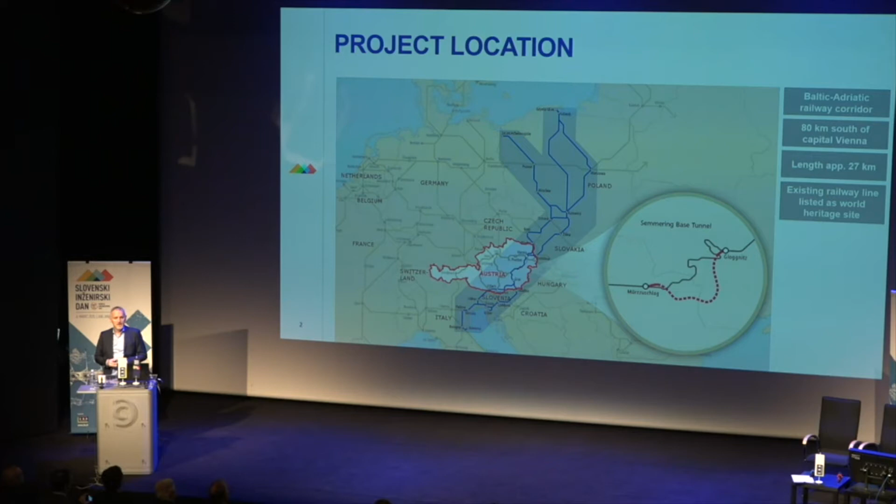In addition, it's a designated World Heritage Site, which is also not in favor of modernization and renovation, as you all might know. The new alignment is shown already in the red dotted line, and we can see this later on in more detail.

That's why the Austrian Federal Railways decided to go for a new solution, the Semmering Base Tunnel. It has a total length of 27.3 kilometers and is a twin-tube single-track system.

It's connected by 56 cross passages, and we have an emergency station in the center of the tunnel.

We have 4 main tunnel construction lots, indicated here on this slide, and it's a mixture of TBM and NATM approach. There are 8 kilometers of TBM excavation in the center of the tunnel, in the central construction lot.

There are 2 times 19 kilometers of excavation by means of NATM. The reason for this is the geological conditions, which as you will see later on are quite complex.

Excavation started in 2014 and will go on till 2022, so we hope. Excavation is only taking place from the east, from the Portal Gloggnitz and not from the Portal Mürzzuschlag, which you can see on the left-hand side.

No excavation is taking place there. This is due to restrictions in terms of noise and pollution.

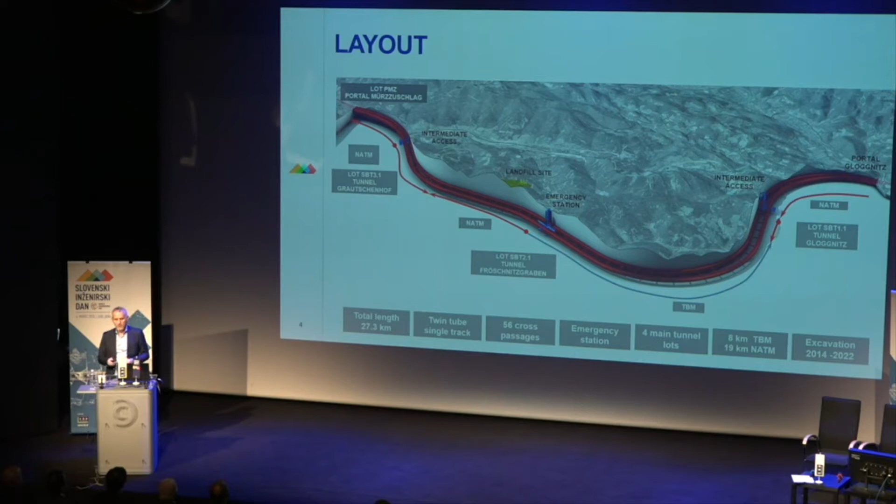This shows how the whole thing is structured, showing the different construction lots from the entire project. You can see it's divided into certain areas. We have the Portal Gloggnitz on top, the Portal Mürzzuschlag on the bottom, and in between we have the 3 main tunnel construction lots.

As well as the Tunnel Grautschenhof, equipment and tracks as areas. These areas are further subdivided into individual construction lots.

In red, highlighted in the red rectangles, are only the construction lots I was talking about before, the main tunnel construction lots. So the main subsurface tunnel construction lots, as well as the Portal Mürzzuschlag, where we have a cut and cover section.

And you see immediately, it's almost 30 different construction lots, different contracts. So a lot of people are involved in this project.

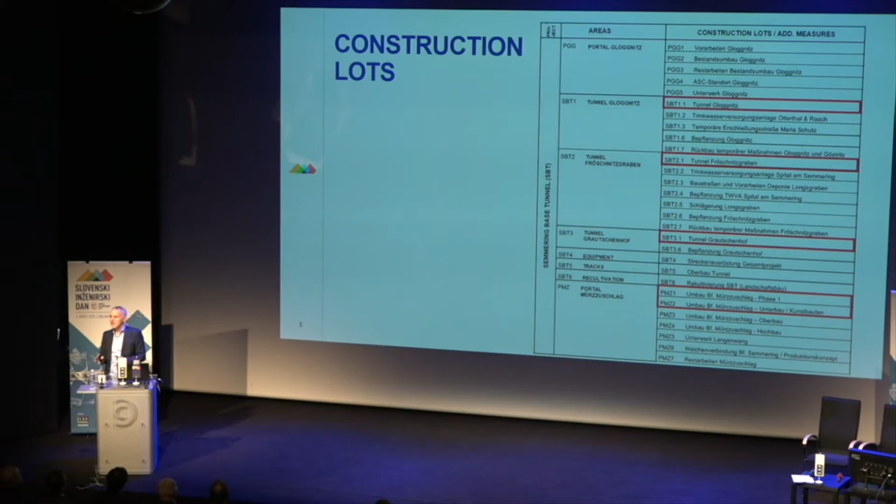So you can imagine tools have to be integrated, means and measures have to be integrated so that this works out properly. Just a few words, as I said before, about the geology.

You can see on the bottom of the slide the entire longitudinal section, rather small but quite colorful. The red circles show the intermediate access points, and it's frequently changing conditions.

So we have metasediments, carbonate rocks, crystalline rocks - 40 different rock types are designated by the geologists in the design. Meanwhile, we found a couple more, and there are even areas where we have more than 300 liters per second of water inflow, which we have to overcome.

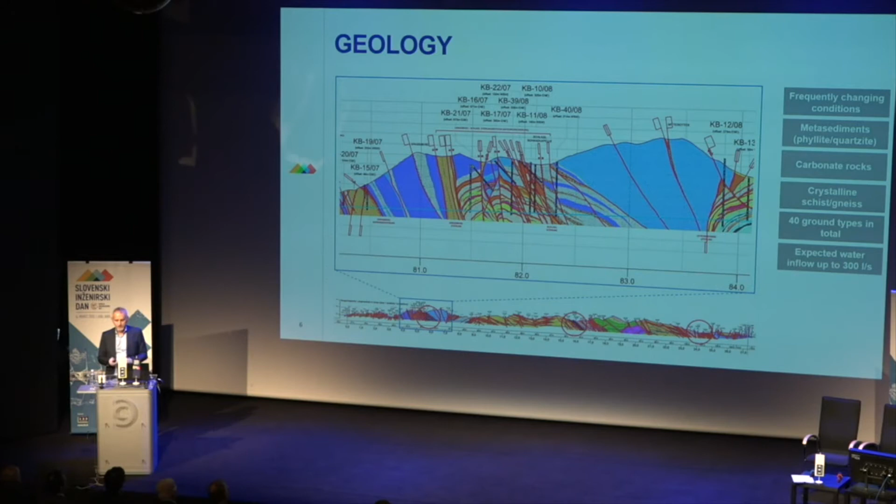The detail in the rectangle shows also one of these very prominent fault zones which we are dealing with now, and you can see it's quite a challenging project. I have to admit, for a tunnel engineer, it's the best you can have.

You have everything, so it's very interesting. Let me tell you a little bit about the structures. These are the single-track tunnel tubes. On the left-hand side you see the TBM solution, on the right-hand side the NATM solution.

We have a double shell lining system, meaning an outer lining - either the segmental lining or the shotcrete lining - then the waterproofing system with fleece and a waterproofing membrane, and then a cast in situ lining. There's a drain system with sidewall drainages on either side, and a slab track or a mass spring track bed is applied. The mass spring track bed is only applied in areas with rather shallow overburden, let's say 100 meters, and residential areas above.

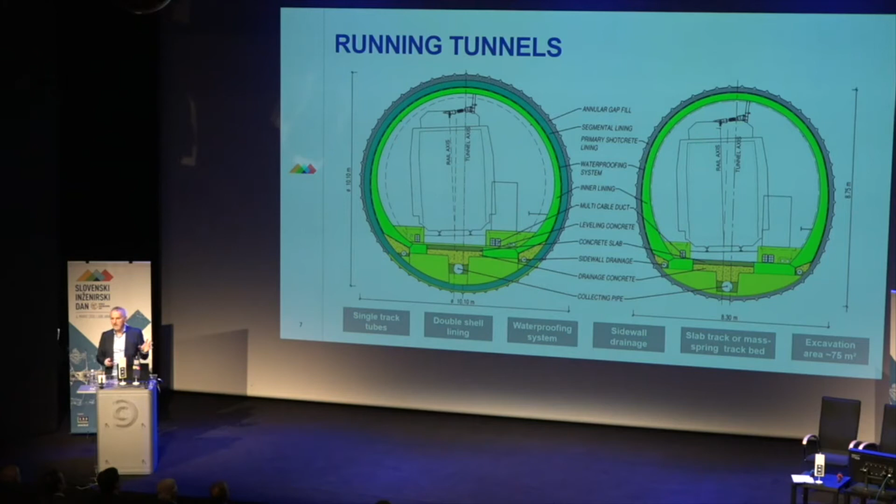As I said before, we have 56 cross passages. They have the same lining system, a double shell lining, waterproofing system and outer lining, excavation area around 35 square meters. The cross passages have a spacing of around 500 meters, or maximum 500 meters.

This is also optimized now during construction. So we were not going to the maximum for each cross passage - we were trying to optimize now, given the geology we are encountering.

These cross passages are not only foreseen so that people can cross from one tube to the other, from the affected to the non-affected tube, but they also house electrical and maintenance facilities. You can see this on the side - there's the emergency passage, and on the right-hand side you see there are technical rooms equipped in these cross passages.

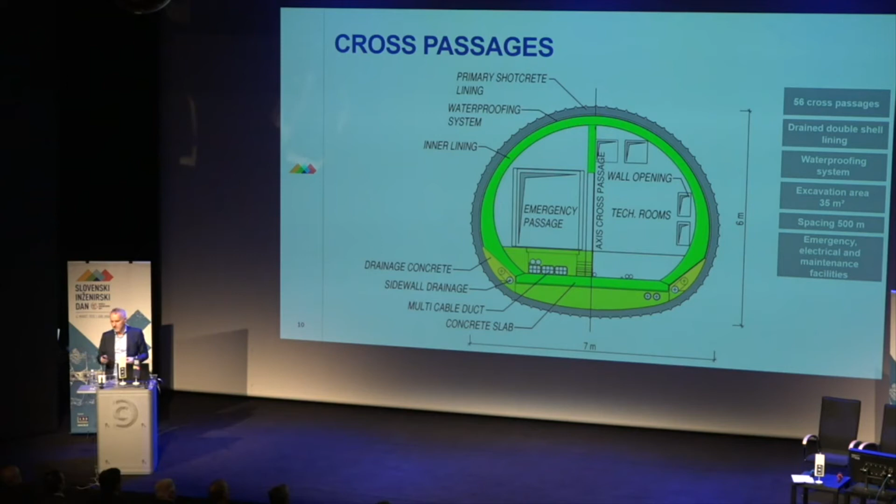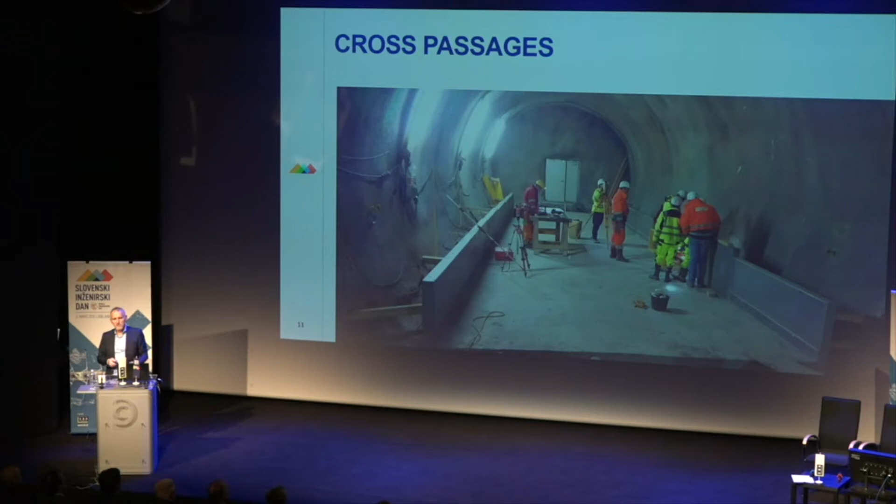This is now one of these cross passages from the NATM section, where already the invert concrete is cast. It's just closed to the running tube for ventilation purposes on the opposite side.

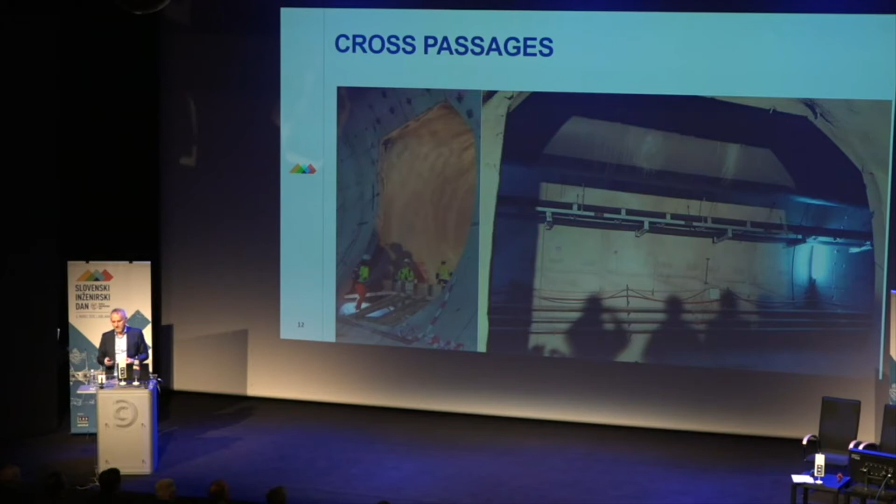As said before, what we also have is an emergency station in the center of the tunnel. It's given by the law - if the tunnel is exceeding 20 kilometers, you need an emergency station.

And this emergency station consists of various structures - caverns, tunnels, passages, galleries. Size-wise, it goes up to 300 square meters.

People leave the train, cross via the escape passages to the rescue cavern, wait there till they are picked up by a rescue train in the non-affected tube. This is more than 300 meters long, and it's also used, as you can imagine.

And from this construction lot, at two of the shafts, 2 TBM drives and 2 NATM drives have to be equipped. So all the material supply and disposal has to take place via these 400-meter deep shafts.

And that's why this area underground is already used during construction - these caverns, for placement of the site installation. So all the site installation area, which we normally have on ground or in the area of the portals, is put underground in this case.

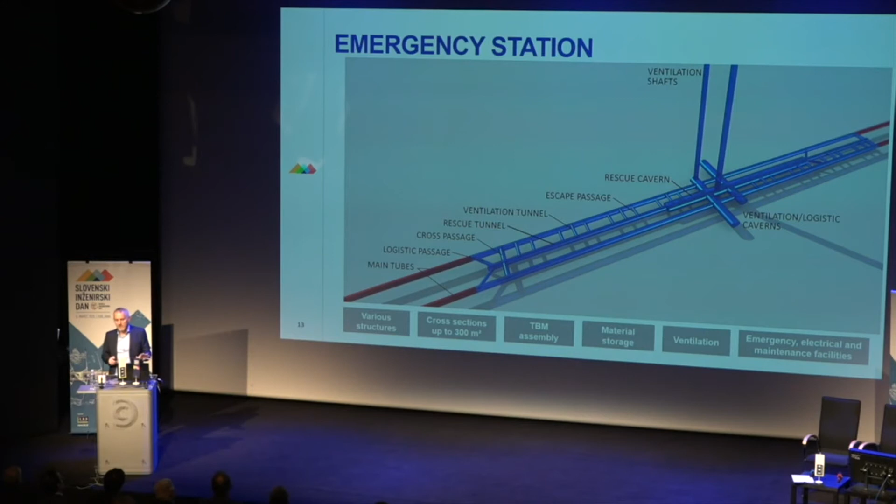This was the idea from the design: all these site installation facilities, which you normally have outside, are brought underground. This is at the toe of the shafts, and we have the workshops, the concrete plant, the material storage—everything is put underground.

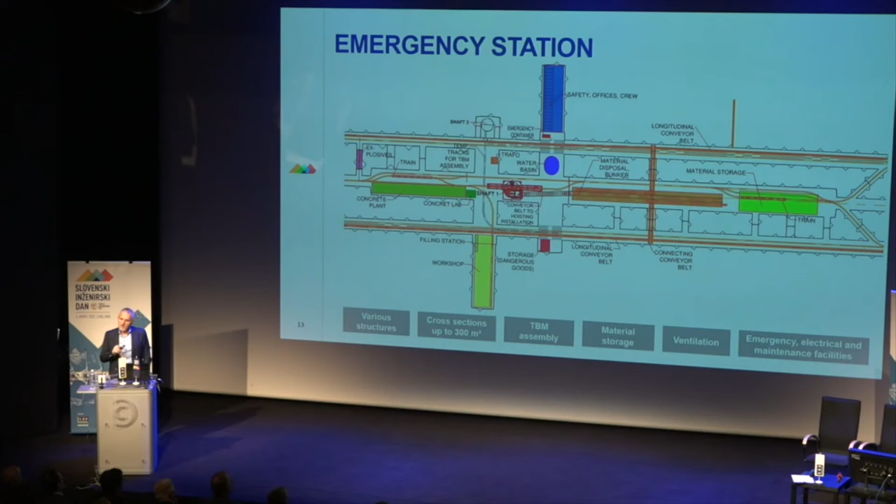You can also see these inclined cross passages connecting the cavern area with the running tunnels, just to facilitate the track alignment during construction.

This is also showing the arrangement of the conveyor belts. You see the running tunnels left and right, the cavern in the center, and the ventilation gallery, which is a permanent structure, and the temporary mucking gallery, used for these conveyor belts just to get the material out of the excavation of the running tunnels in the main cavern, into the bunker, and up through the shaft to the surface.

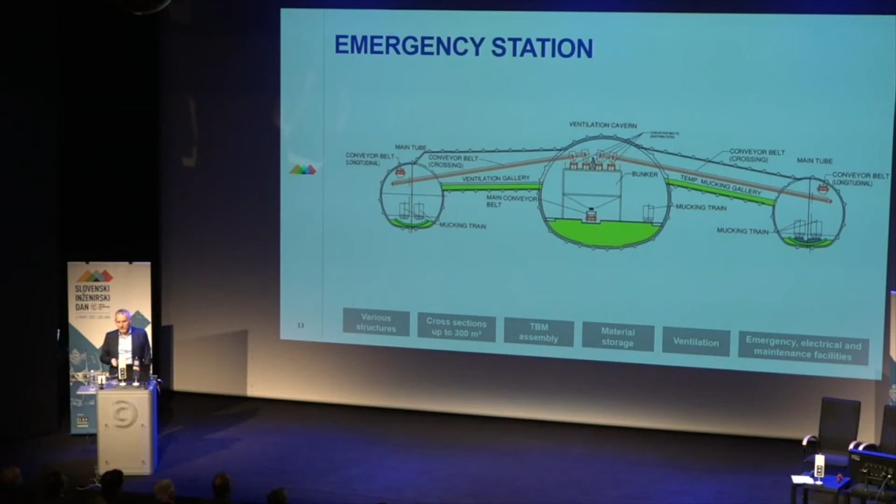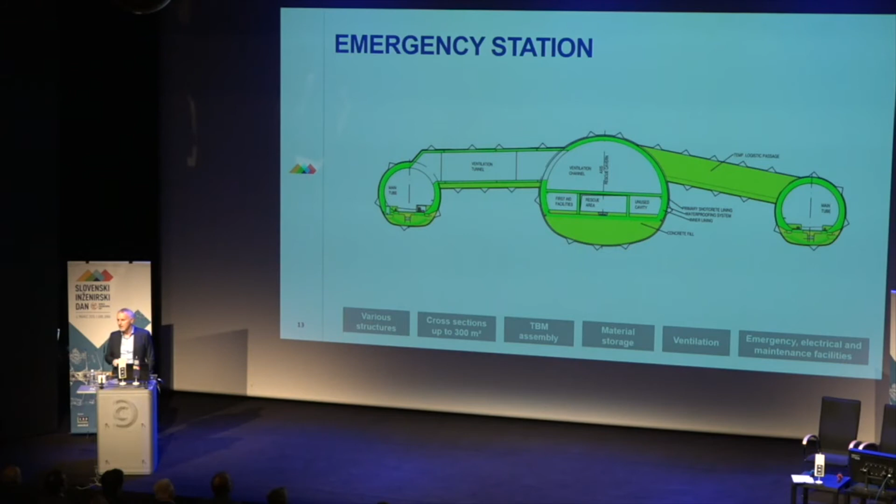In the final configuration from this situation, the temporary mucking gallery will be completely backfilled, and the ventilation tunnel will be kept open for ventilation purposes. In the cavern, the final configuration also houses maintenance, electrical and emergency facilities for ventilation purposes.

Also, the TBM assembly took place 400 meters underground, in the center of the central cavern. This is done prior to the start—this is the first TBM that has been assembled. All the material was brought down through the shafts, and the assembly took place in this cavern.

The size of this cavern—the assembly of the TBM—was one of the decisive factors for the size, because you had to turn it around and shift it forth and back. This gave the size. Even if you don't need this size later on, this was the decisive factor for how to design the whole cavern underground.

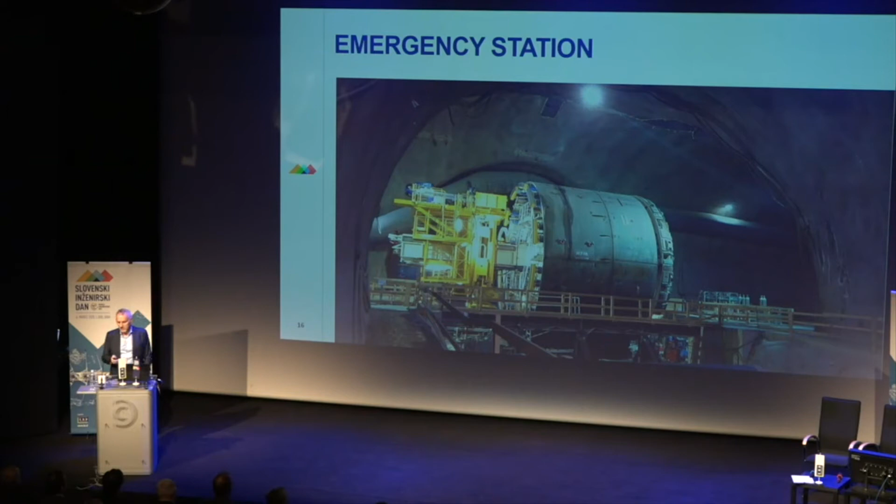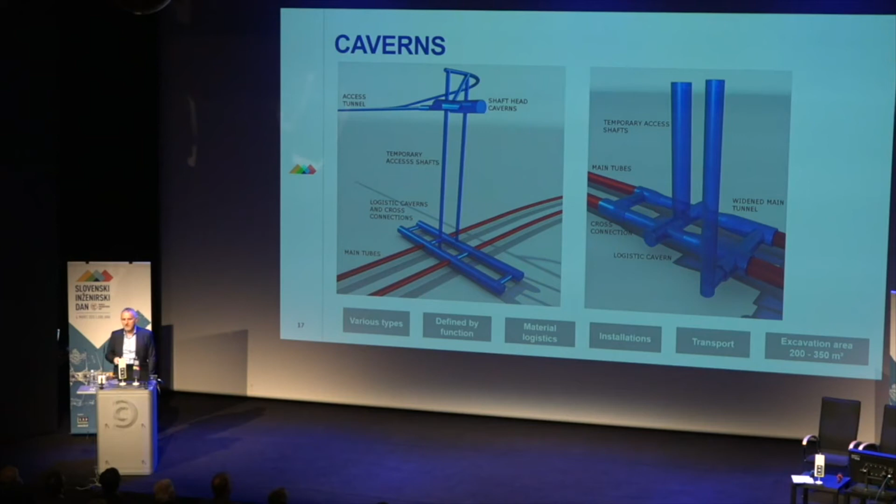Excavation areas of these caverns are in the range of 200 to 350 square meters, so considerably big structures. These caverns will be backfilled at the end of the day.

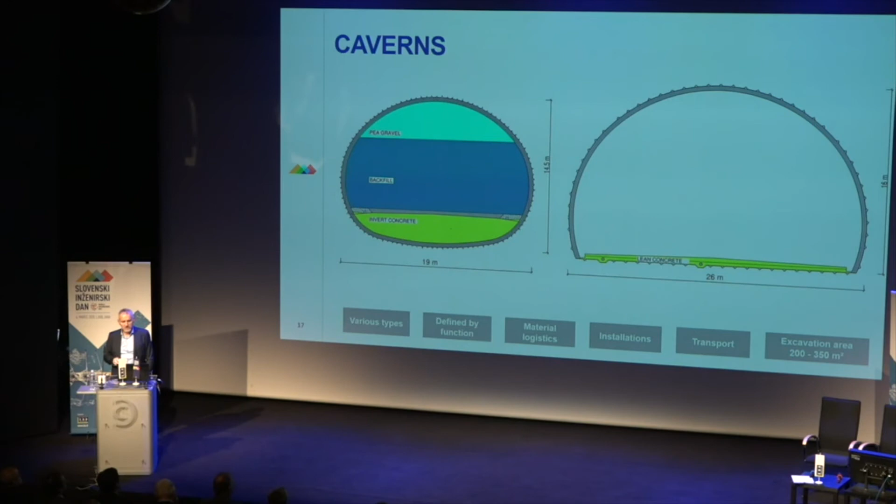This slide shows the final configuration of the construction contract. This is one of these caverns—it will be backfilled for the majority, but in this case a certain part will be kept open for the next contract.

For the contract covering track installation and equipment installation, they need a logistic possibility to cross from one tube to the other—otherwise it's too small to turn around. This has already been considered in the design at a very early stage: how can the later contracts, track installation and so on, work under these conditions?

Because there's 27 kilometers of tunnel and you only have access from two sides, it's not so easy to bring equipment and material in and out. This opening will be finally closed only once they go into operation, so even the final equipment installation contract has to close this somehow. They will find a contractor who can do this, hopefully.

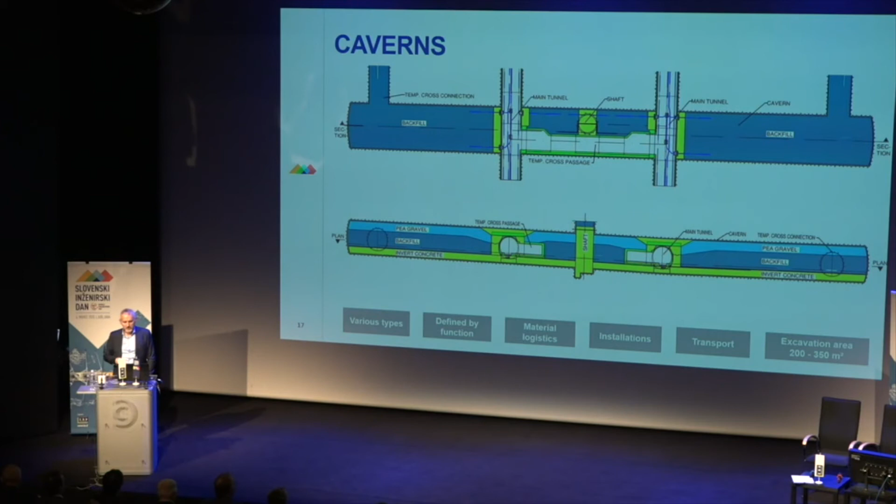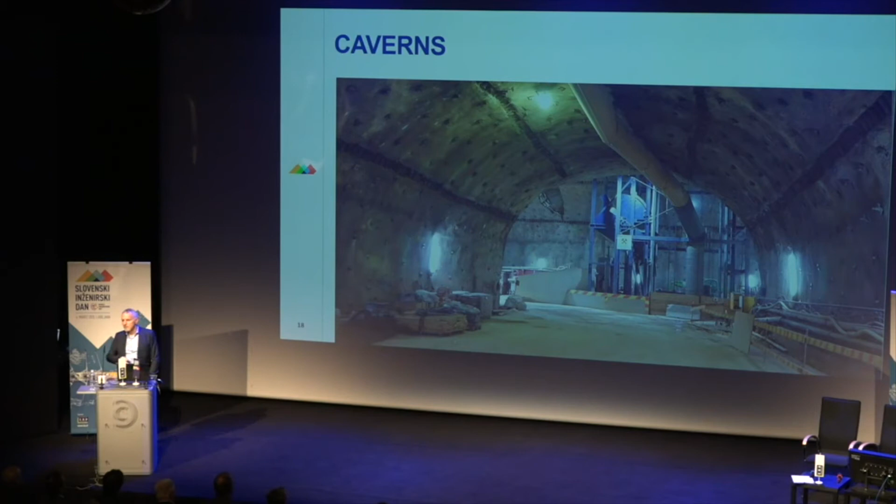This is now a picture of one of the shaft head caverns, at the end of the 1 kilometer long access tunnel. You can see the hoisting installation. The shaft goes down 200 meters, and the picture is taken from the other shaft, which is connected by a cavern here. This also acts as a site installation area and material storage in between. This is the shaft head cavern.

At the western access point, we can see a picture from the beginning, from the shaft excavation. A cavern was built perpendicular to the running tubes, and you can see in the background on the left-hand side the start of one of the running tunnels already.

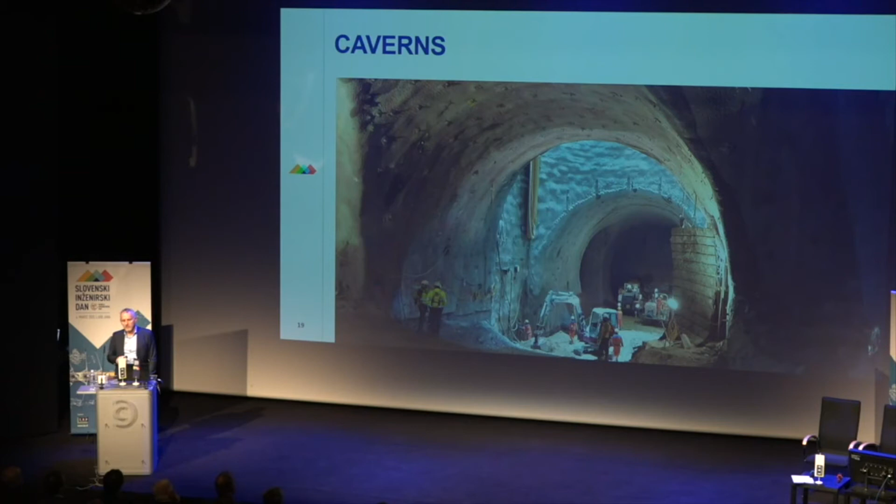The TBM was also defined already in the tender. In Austria, it's common practice that the client defines some requirements for the TBM, because the contractor normally doesn't have that much time. So the client defines the type of TBM, in this case a single shield, and minimum parameters like torque, thrust, and so on. It's also important that the machine has to be equipped or ready for additional measures like injection, grouting, and pre-drilling. This is already foreseen and defined.

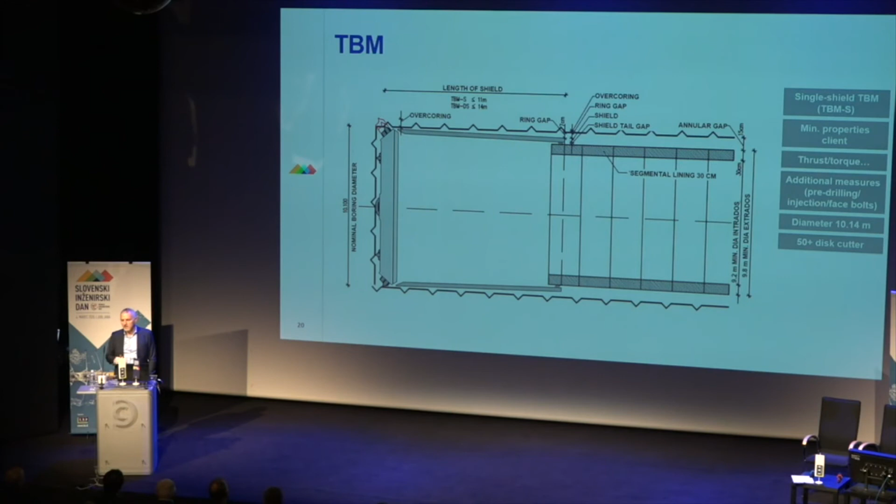Also the segmental lining was defined, precast, with 3 types defined depending on which load was taken - normal, high load, and in the area of cross passages, where you can imagine there's higher load. It's a 6+0 system with a minimum thickness given. It's also important that the contractor does not tend to squeeze out completely, or we run into troubles with cracking and so on. Planar joints, and the important thing is the segmental lining.

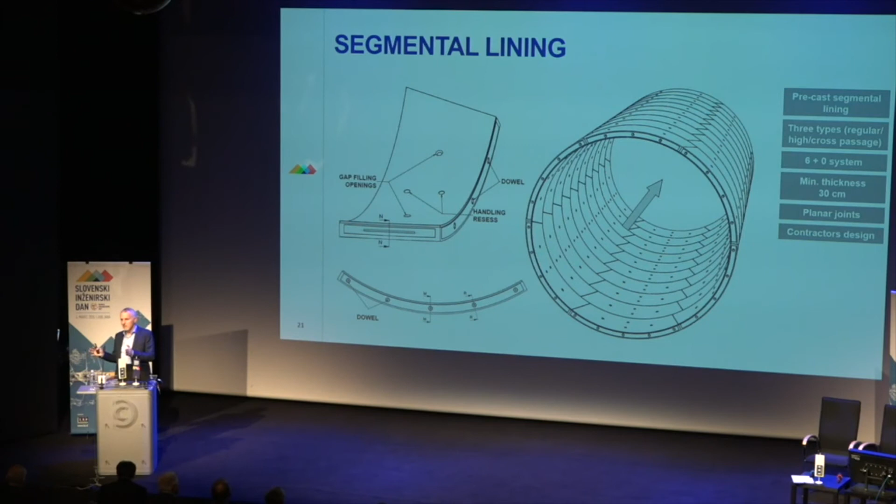The design for the segmental lining in Austria, in this case, comes with the contractor, because it's very closely related to the machine, to the pistons and so on. So there is a boundary given from the client, but the design comes from the contractor.

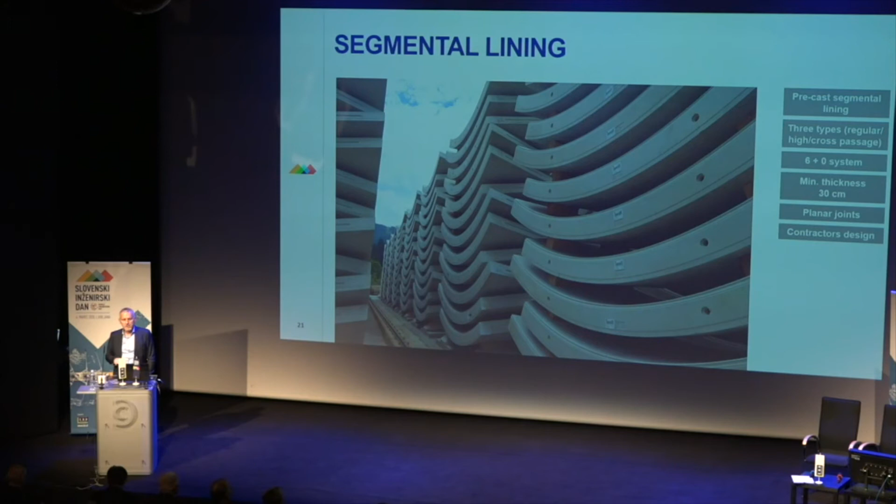Here are some pictures stacked on the surface for 2 rings, always 12, prior to transport via the shafts down to the toe. And then they're down already here waiting in the cavern, waiting to be installed in the running tunnels. This is the final configuration prior to the installation of all the inner lining and all the other things.

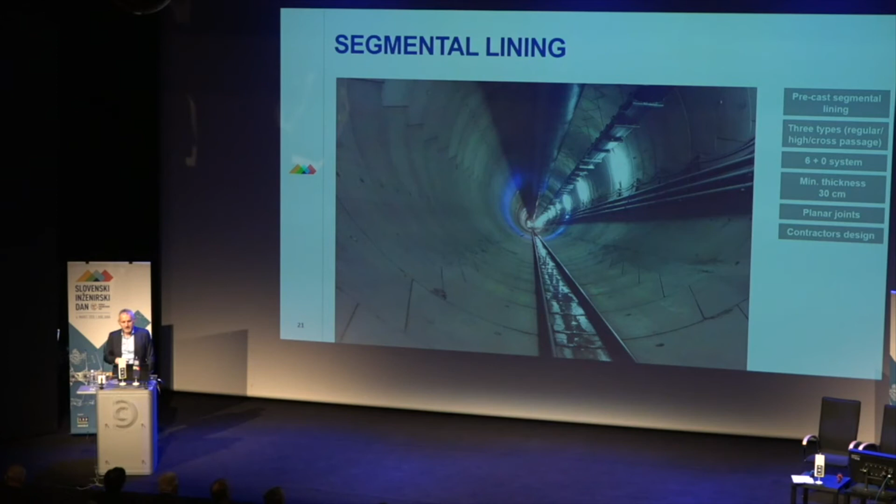Okay, so far technically, and now let's go to the management project organization.

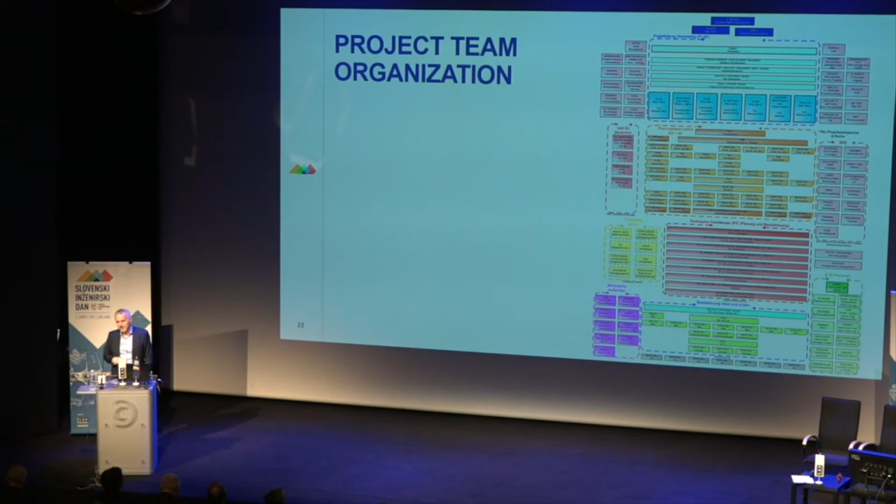So in the client's project team, we have a project head, for sure - the project lead, one person, supported by his office staff and management, cost, risk, and so on. But under the project lead, for each individual construction lot, which I showed you before - more than 25 - there is a so-called coordinator.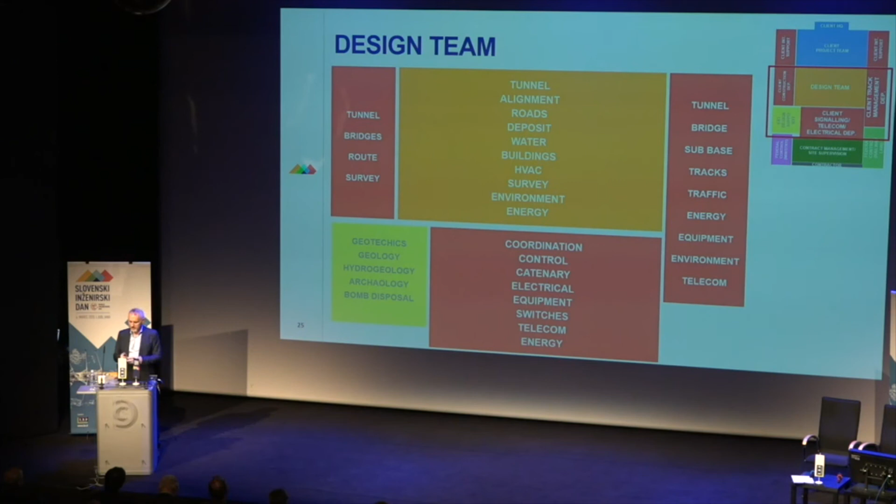Finally, let's have a look once the construction kicks in. We have the contract management on site. The contract management on the one hand are the project coordinators I was talking about before, who come from the client, and the contract management is also done from our side. So we as a design team have also our contract managers on site, because they know about the contract, we develop the contract, they are the specialists.

We have a site supervision on site, it's a separate contract. They are on site, in case of the tunnel, 24/7, around the clock. We have a geotechnical site supervision - we will see later on his role - who also comes from our side. They are on the site also 7 days a week. We have the tunnel survey on the site and the health and safety inspectors for sure, and then the contractor for sure.

They work on a day-by-day basis, daily meetings with the contractor. I just listed here project manager, site manager, claim manager, but all these people who come with the contractor have to interact on a daily basis with this contract management and site supervision team. And there it's also very important that people can work together.

We encountered some problems because there are problems on a personal level, and this is a thing which I had to learn the hard way. You have to set certain actions, otherwise it's not working out. You cannot try to solve things by just saying, okay, let's try.

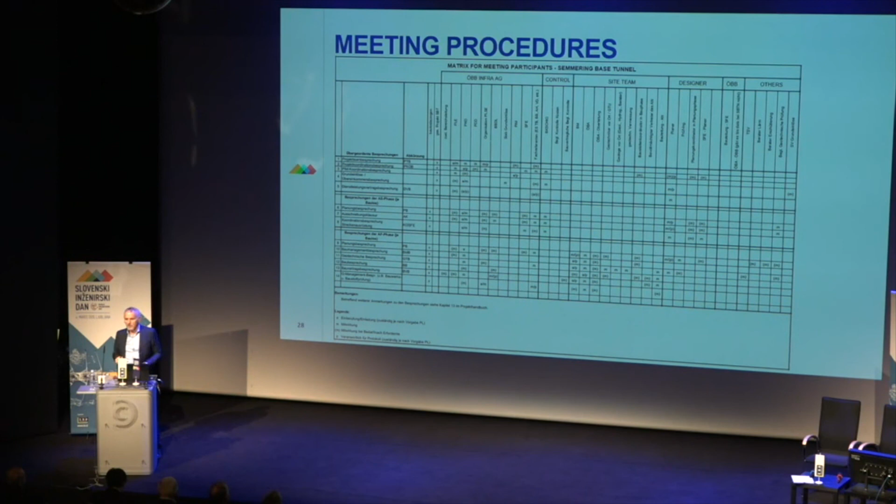Looking at this, just picking one geotech meeting out, there's a clear definition of who is responsible for organization and protocoling and who has to participate. Other people are not allowed to participate because they're just wasting our time, air, and money. Some people are participating if required only. So this is also very important, that for all the different meetings - you can imagine, big project with lots of meetings - it's very important to have procedures.

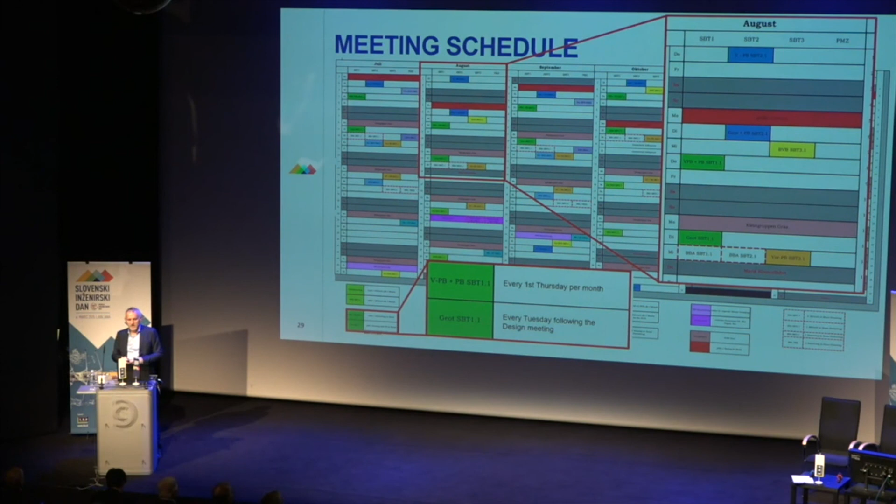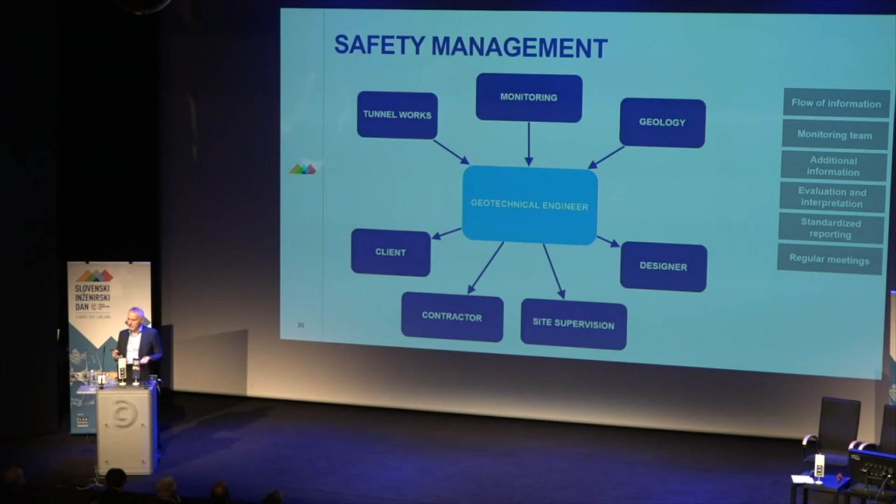Quickly, some safety management information. The geotech engineer is in the center. He gets the information, evaluates, interprets, checks whether the behavior is as expected or deviating, and gets the information out. This is all set in rules in the geotechnical safety management plan, and there are regular meetings.

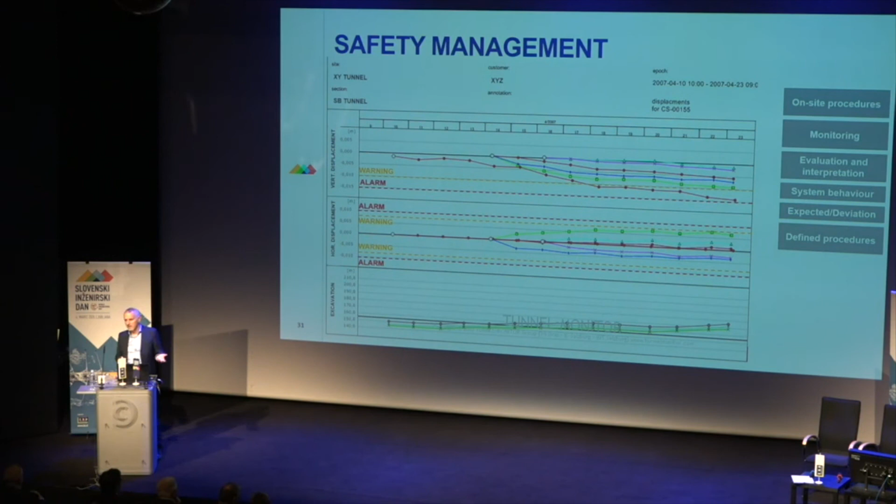So the daily business looks like this. On-site procedure: he gets the results, he evaluates, he has a look, and if it's as expected, it's fine. If it's deviating, there are certain procedures, and the procedures are shown here. This is all given, and you have to follow this.

It's a warning level, there's an on-site meeting. Only the geotech, contractor, and site supervision decide the measures. We are informed afterwards, the client is informed afterwards. An exceptional meeting takes place only if they think so.

If an alarm level is reached, immediate measures have to be set. You cannot wait if it's cracking and have a meeting before that. So the contractor and the site supervision have to take immediate measures, then the project lead takes over the leading role, the information goes out, and you have an exceptional meeting.

These meetings take place every day of the week. So quite often we are out there on a Saturday or Sunday, which makes the family quite happy, but it's mandatory - these meetings are mandatory if it's an alarm level.

So coming to the end, just to give an update about the current status of the works. The central construction lot, the caverns, the shafts - all this is finished. The TBM drives to the east are in for a length of about 3.5 kilometers. The NATM drives to the west are in for a length of about 2.6 kilometers each tube.

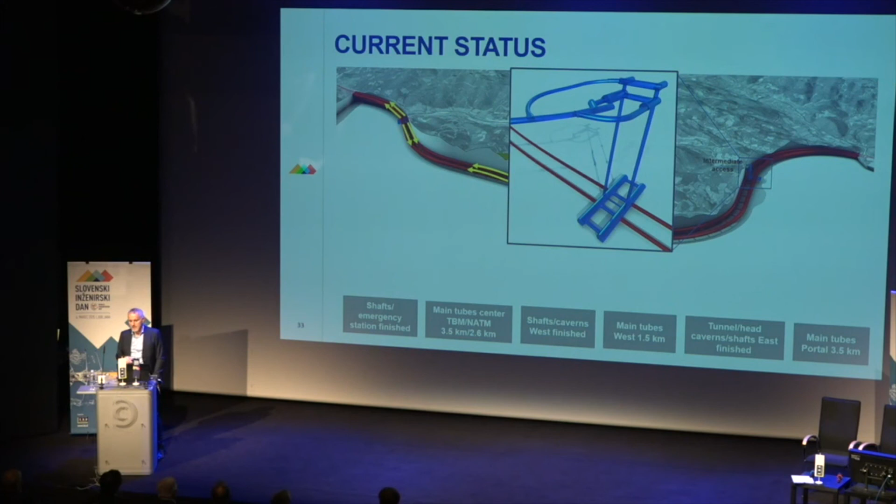The western intermediate access point shafts and caverns are finished, and all four tubes are excavated over a length of about 1.5 kilometers. On the eastern intermediate access points, the access tunnel, shaft head caverns, and shafts are finished, and the caverns are due to be finished within the next couple of weeks, and then we start the excavation of the running tubes. Excavation from the Portal Gloggnitz is in for a length of about 3.5 kilometers by today.